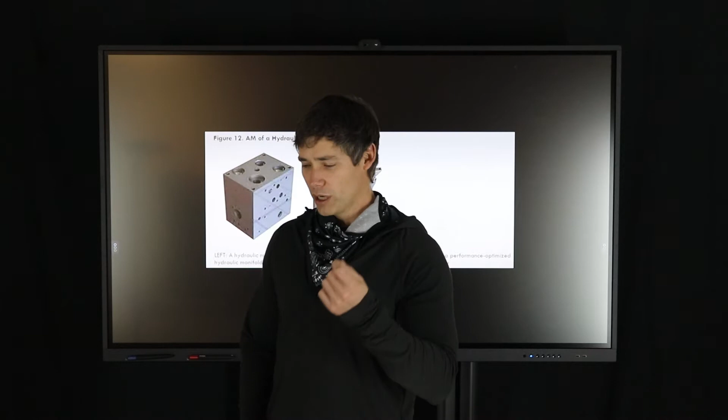You'll hear folks say, well, additive can't do this, it's only for prototyping, it's not for end-use production, but that's not the case. And the question, of course, is why? What is really happening? What's the real data behind this drive? And there's a great publication that came out recently by MIT in terms of why additive is becoming mainstream. And here's a great example from that publication.

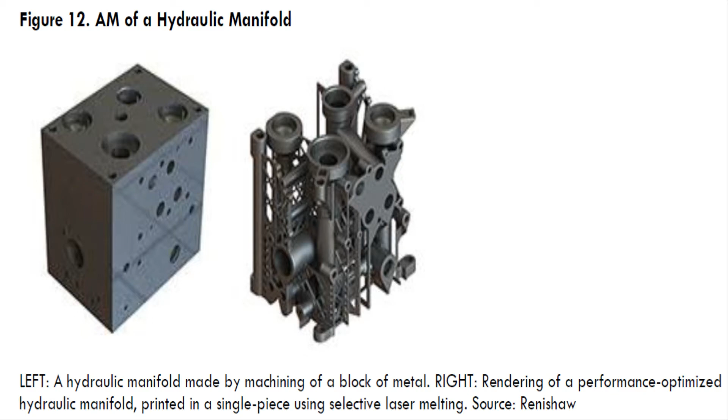It gives the example of, and you can see this on your screen for a second or two, you can see two parts, one on your left and one on your right. The one on the left is the conventional way of making a hydraulic assembly. The one on the right is the additive way. And if you'll take a look at this with me, we can see the same image right here behind me.

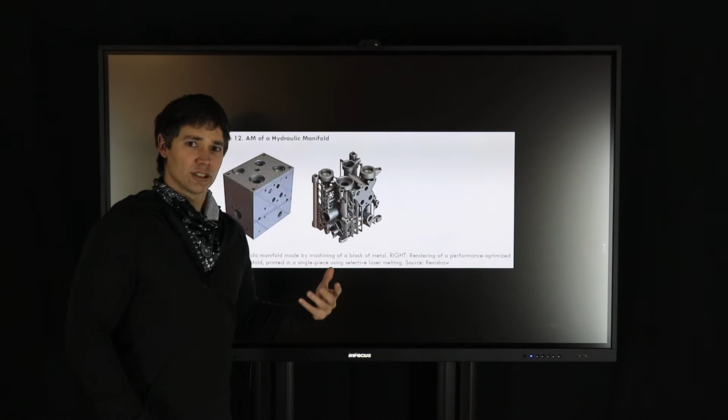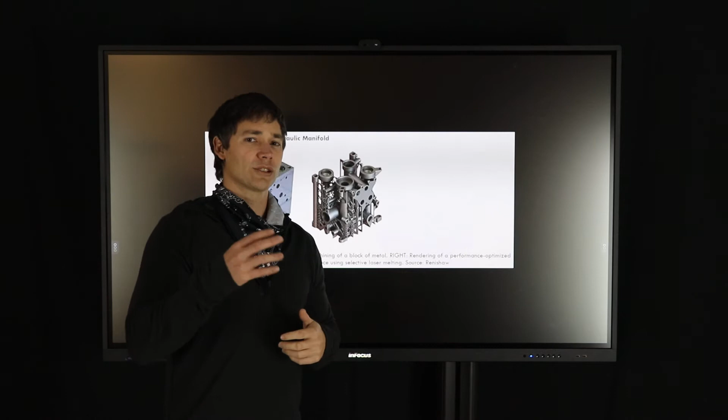And the way this hydraulic manifold is actually done, conventionally speaking, is that you take a big block of steel or metal, and you drill holes and pathways through it to allow the hydraulic flow and the fluids to go where they need to go. It's very linear, it's very straightforward, you can't do a lot of curves, you're very, very limited, but that's how we do it. Now, understanding that with additive, we can create custom shapes from the inside out, look at the additive solution.

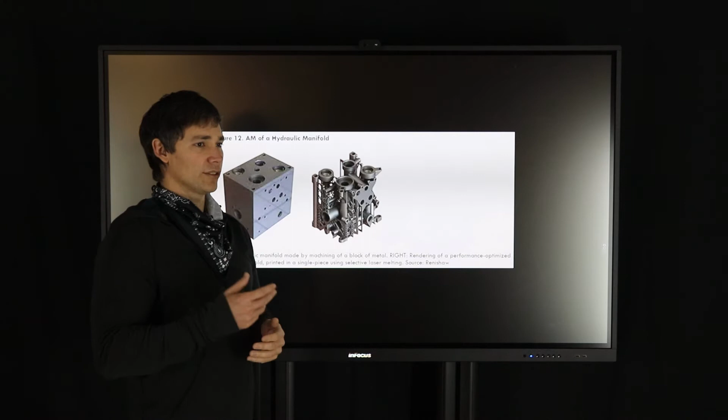The additive solution, as you see, can actually be built in a single 3D printed shot, which means that you only have to run the printer. You don't have to go get a block of material, shape it down to a certain point, and then start drilling holes. You just take a bag of material and start printing what you want.

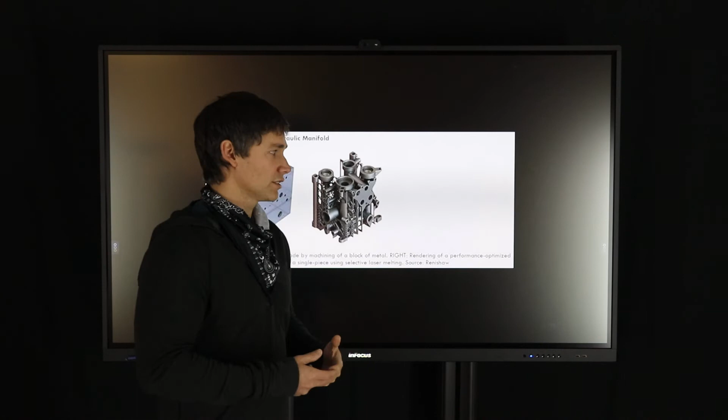And you can tell one major difference between the two. The one on the right is a lot less metal. You can even see that it has a lot of lattice structure to it. It's very well supported. It's very, very simple, and it just gets what you need. And so it's pretty obvious to any onlooker that this is a much lighter part because of the wasted space from the part on the left.

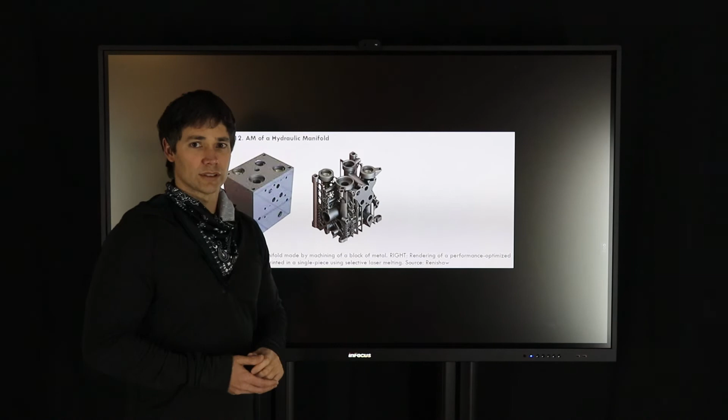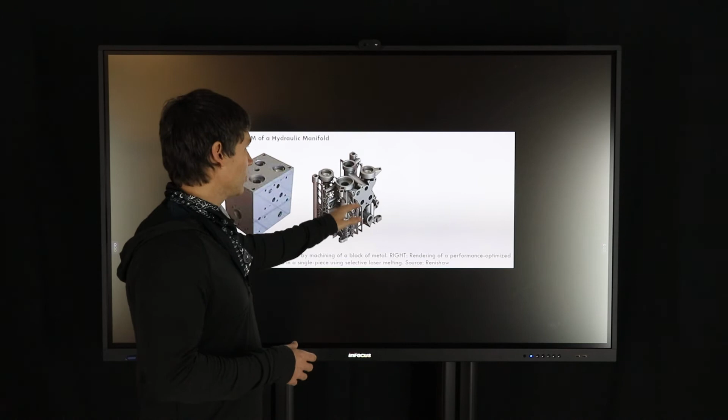And there's a key part there. The part on the left is so big and bulky, not because it needs to be, but because it's cheaper to leave it big and bulky. The part on the right is actually way cheaper by having less material and much less effort. And its functionality is greatly increased because it's so much lighter in weight.

And at the end of the day, it doesn't matter what you're doing. It doesn't matter if you're flying a plane, driving a car, or even in shipping. The less material, the less mass, the more efficient the product is, even if it's just shipping it from one side of the country to the other or across the world. If it's in a plane, that's super important. If it's in a car, it's super important. Lighter means more energy efficient, and actually technically better for the environment too, when you consider the impact metal has on the environment itself.

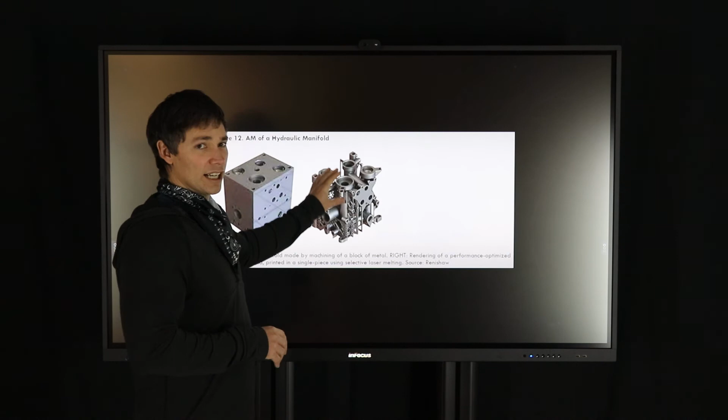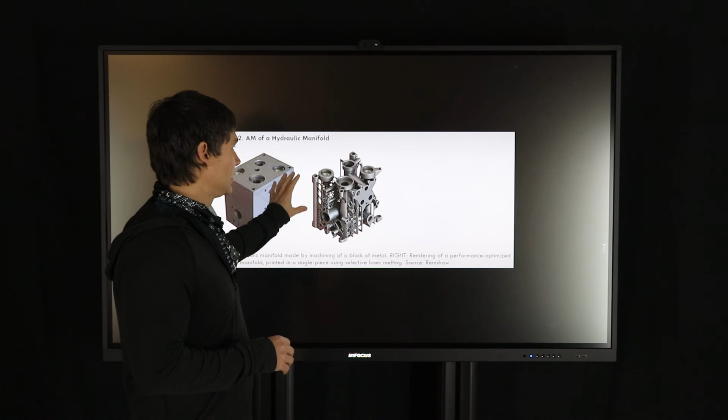So this is what you want to realize with additive. It's not about thinking apples to apples, because the apples to apples comparison is not real. This is like an apple, one that we've had for a long, long time, to this new fruit that we've never had access to until 3D printing came along. Better products, next generation product, lighter, faster, stronger, so to speak.

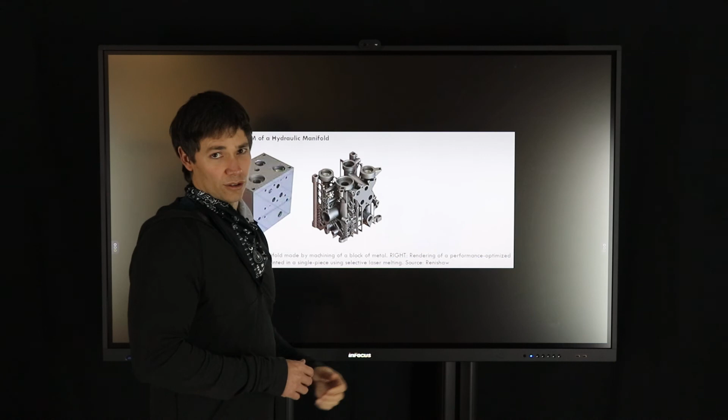So thanks for watching. That's the kind of thing that we want to make sure people understand, is that additive is a completely new way of thinking, and it's a completely new way of even doing business, where one machine can replace several other machines and can cut out lead time significantly.